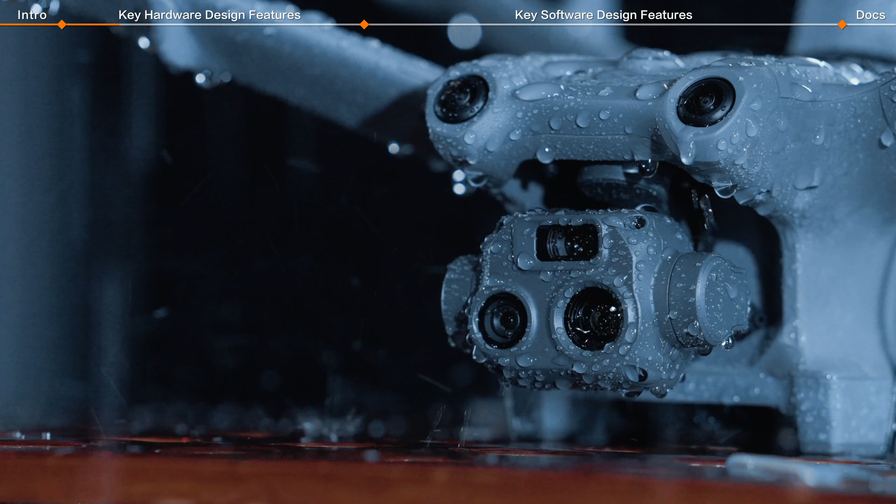Second, IP rating. The DJI Dock 2 achieves an IP55 protection rating, which means it's dust protected and can withstand water jets from any direction. The DJI Matrice 3D series has an IP54 rating, which offers protection against dust and water splashes.

Third, automatic environmental monitoring. The dock integrates various environmental sensors, including a wind speed gauge, rainfall detector, temperature and humidity sensors. These sensors provide real-time environmental condition monitoring to ensure flight safety.

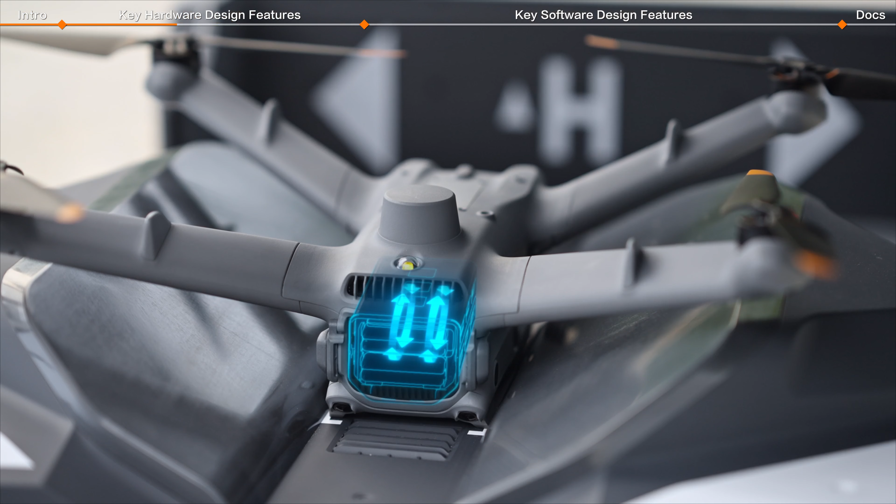Fourth, air conditioning system. The air conditioning system within DJI Dock 2 activates to maintain optimal condition for the aircraft and battery. Cooling system: activates when the cabin temperature exceeds 35 degrees and terminates when it drops below 25 degrees. Activates when the battery temperature is above 35 degrees during charging and terminates when it falls under 30 degrees.

Heating system. If the ambient temperature is below 5 degrees, it activates 1 hour before the task to heat up for 1 hour to prevent propeller icing, and activates again after the task is completed to heat for half an hour to speed up charging. If moderate or heavy rain is detected and the environmental temperature is between -5 and 5 degrees, with a flight task scheduled within 48 hours, it continues heating for 48 hours to prevent propeller icing.

Fifth, backup battery. The dock includes a backup battery with a capacity of 12 ampere-hours, which can power the dock for over 5 hours in case of any emergency power outage, allowing the aircraft to safely return to home.

Sixth, wind resistance. The aircraft can withstand wind speed up to 8 meters per second during takeoff and landing, and up to 12 meters per second during normal flight operations.

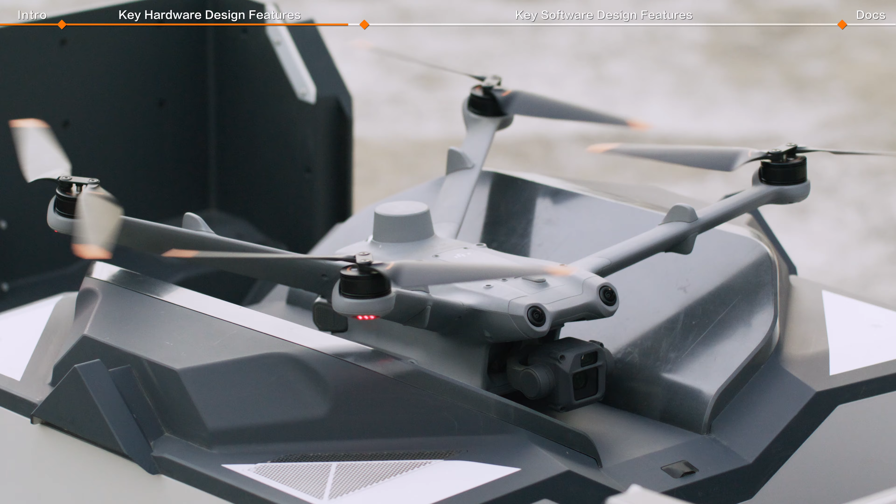Seventh, propeller damage detection. After landing, the aircraft performs damage detection for all propellers, using the visual sensor to check propeller integrity to improve operational safety.

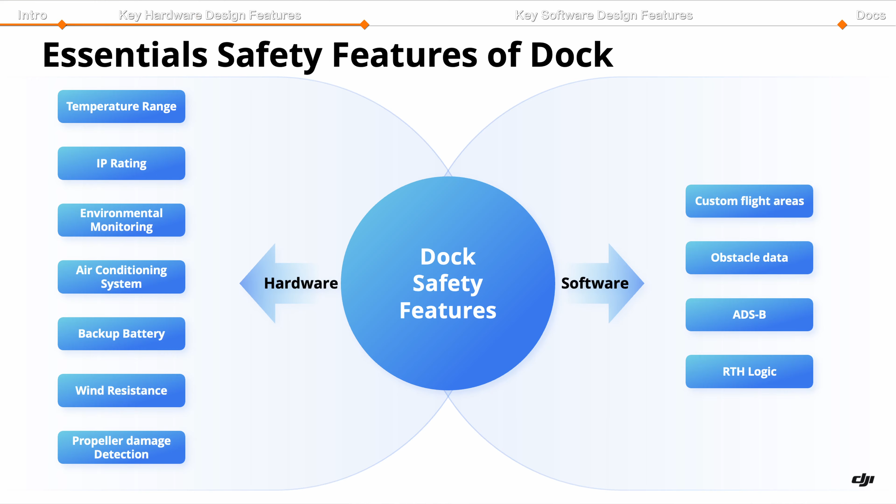And for the software, we will introduce 4 important safety features: custom flight areas, obstacle data, AirSense, and return-to-home logic.

Custom flight area. In our routine dock operations, it's important to ensure that drones do not fly into unrelated areas. Custom flight area supports the creation of task areas and geo zones, allowing the user to draw either polygons or circles. For polygons, the maximum number of vertices should not exceed 255.

The minimum radius of a circle task is 10 meters. Let's see how we can set it up. First, make sure we have the project admin authorization. Then enter the project and click Map Task Area.

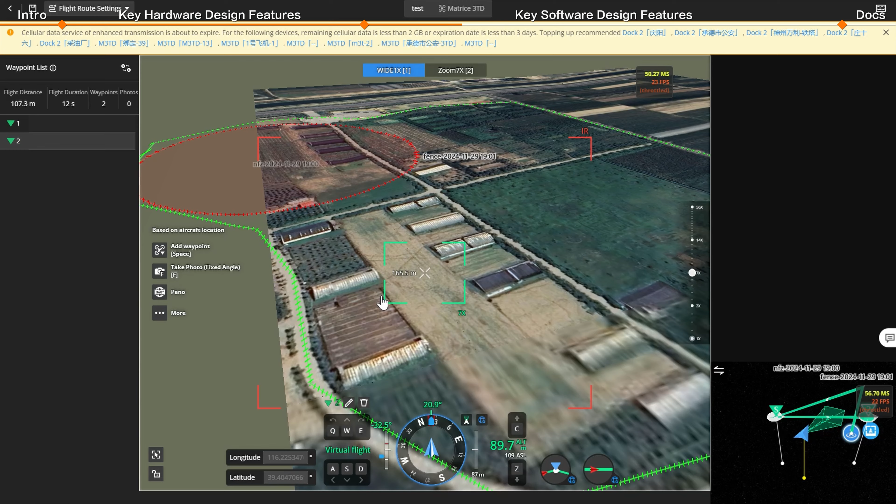Click the icon on the right side to start the planning of the task area and geo zone. After the user confirms the flight areas, they will be displayed during mission planning.

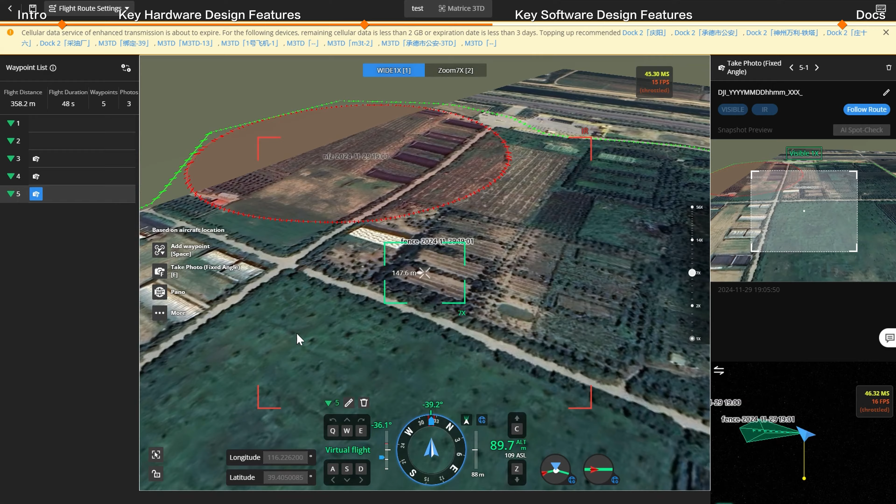During the execution of the flight path, if the drone comes within 5 meters of the boundary of a custom flight area, the mission will be stopped and the drone will return to home immediately. When the drone is planned to pass through a geo zone between two waypoints, or during the return to home journey, the drone will utilize a certain algorithm to automatically calculate the optimal detour route.

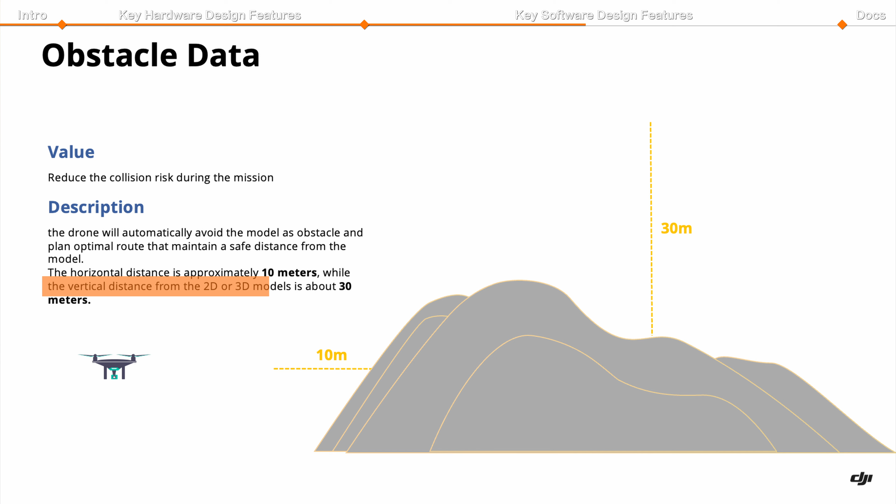Obstacle data. The value of this function is to reduce the collision risk during the mission. After enabling the function, the drone will automatically avoid the model as an obstacle and plan an optimal route that maintains the safety distance from the model. The horizontal distance is approximately 10 meters, and the vertical distance from the 2D or 3D model is about 30 meters.

To enable this function, first we need to import a new model and display it on the map. Then enable the function and update the data. The aircraft will automatically plan an optimal route to bypass the obstacle during flight to task or return to home.

AirSense. The value of this function is to evaluate the collision risk in real time, by obtaining and analyzing the location, altitude, orientation, and velocity of the manned aircraft or helicopter, and comparing the information with M3D's current location, altitude, orientation, and velocity to have air risk awareness.

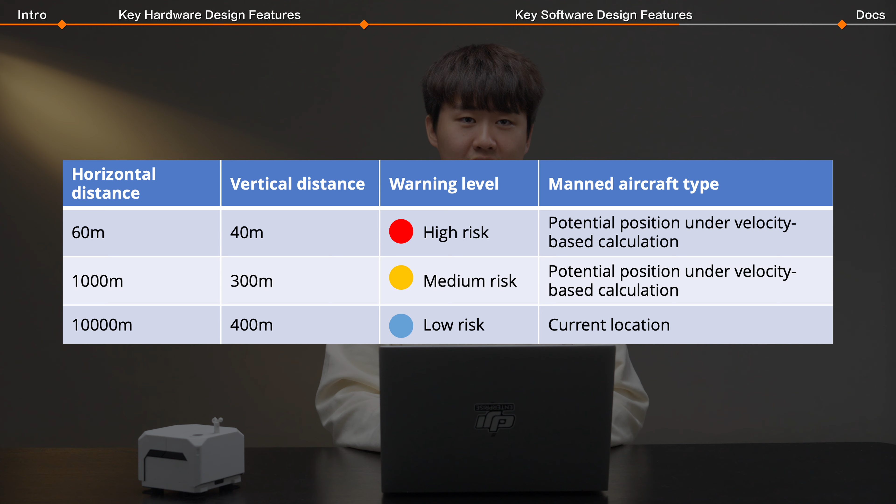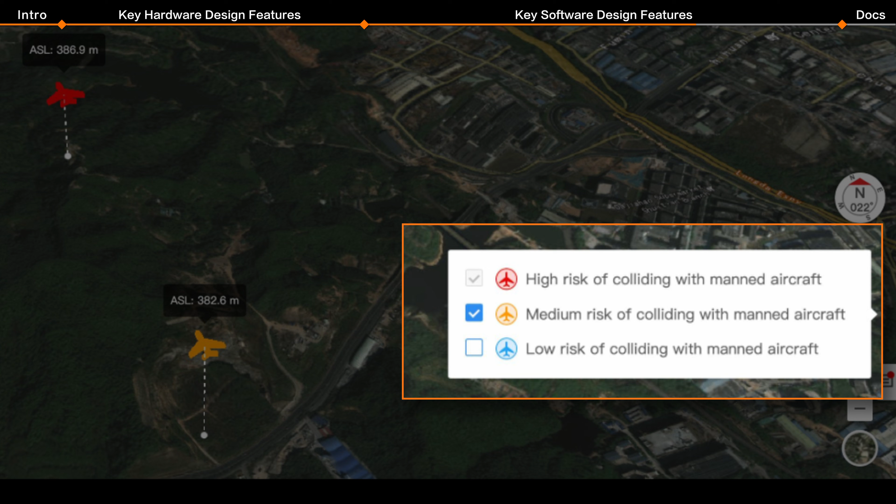ADS-B detection range is 10 kilometers horizontally and 400 meters vertically. Based on the different distance between the drone and the manned aircraft, we define the manned aircraft with threats as high risk, medium risk, or low risk, and display them on the map in red, yellow, and blue colors respectively. The user can also choose to turn off the medium and low risk manned aircraft threats.

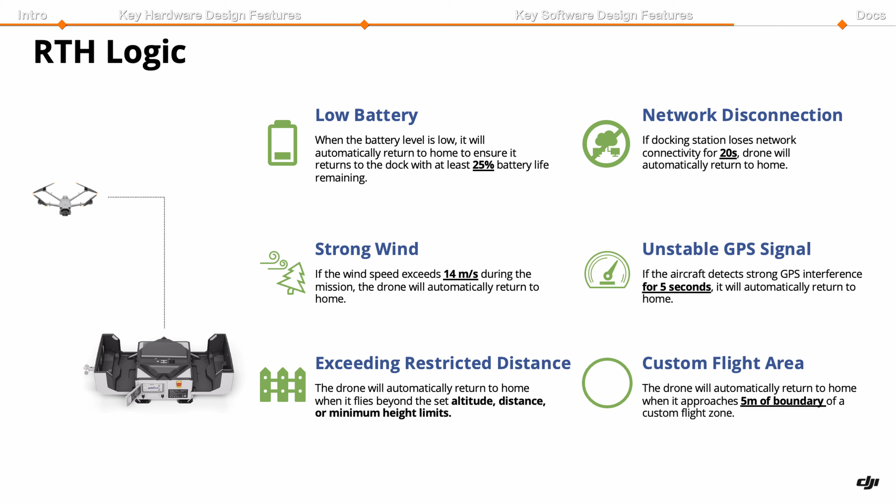Return to home logic. In certain conditions, the drone will return to home automatically. Here is the logic. Low battery: when the drone's battery level is low, it will automatically initiate a return to home procedure to ensure it returns to the dock with at least 25% battery life remaining.

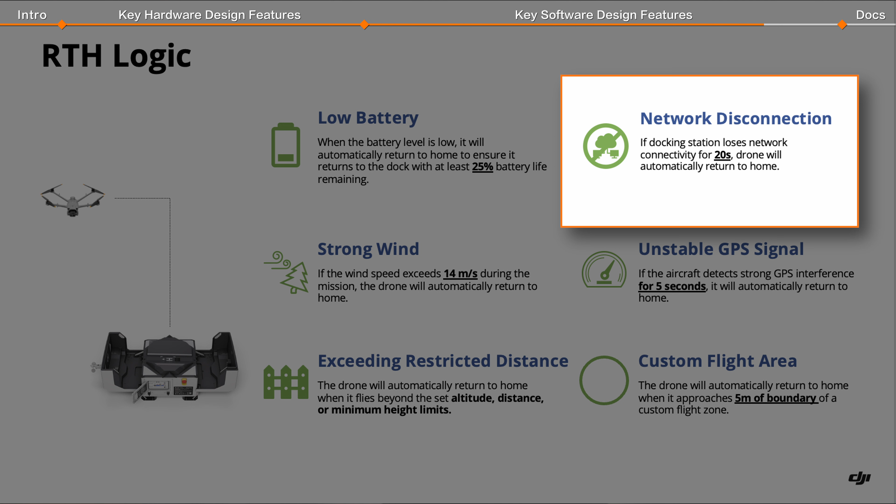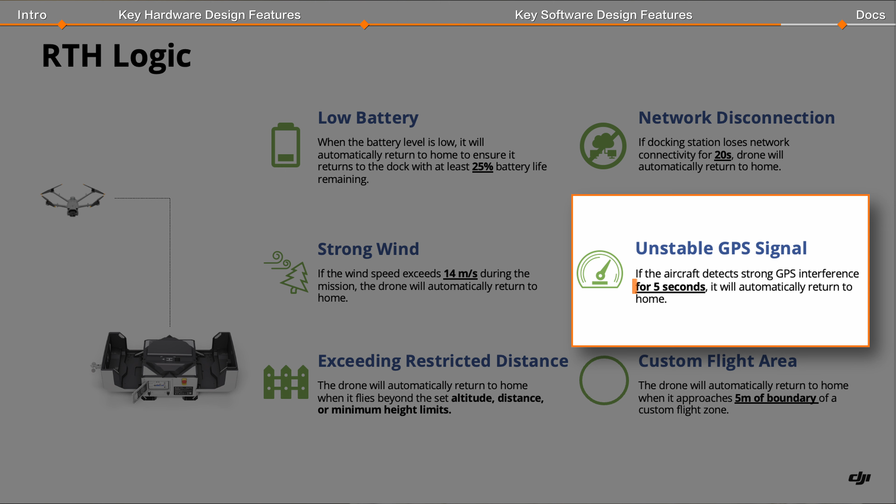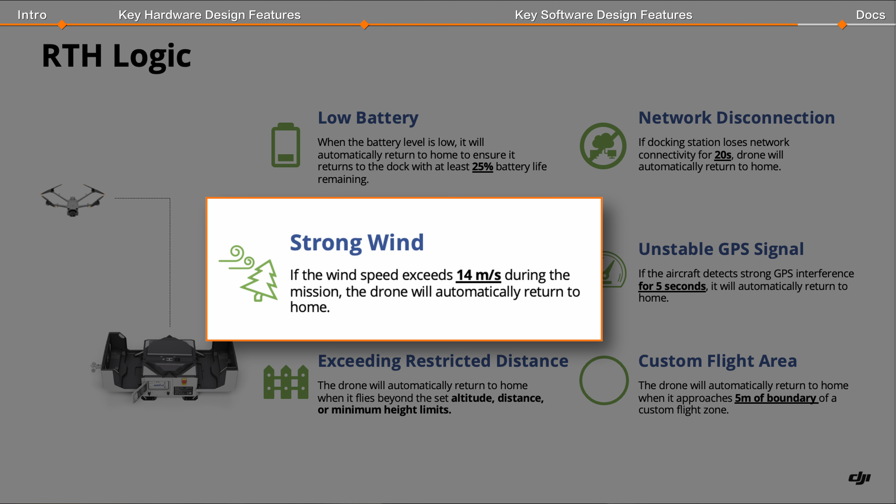Network disconnection: if the dock loses network connection for 20 seconds, the drone will automatically return to home. Unstable GPS signal: if the aircraft detects strong GPS interference for 5 seconds, it will automatically return to home. Strong wind: if the wind speed exceeds 14 meters per second during the mission, the drone will automatically return to home.

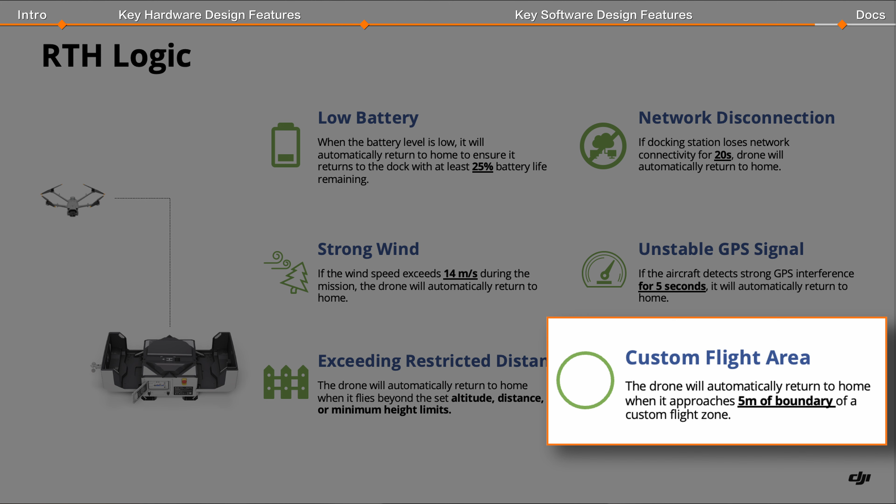Custom flight area: the drone will automatically return to home if it approaches 5 meters from the boundary of custom flight areas. Exceeding restricted distance: the drone will automatically return to home when it flies beyond the preset altitude, distance, or minimum height limits.

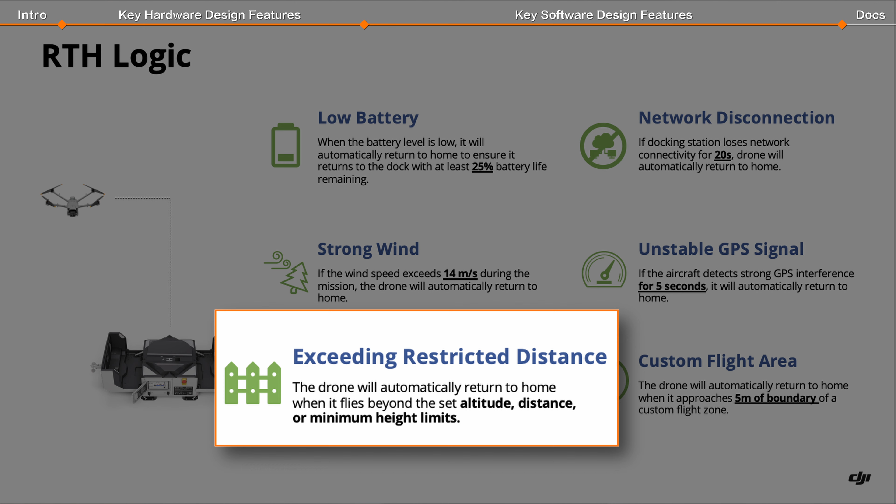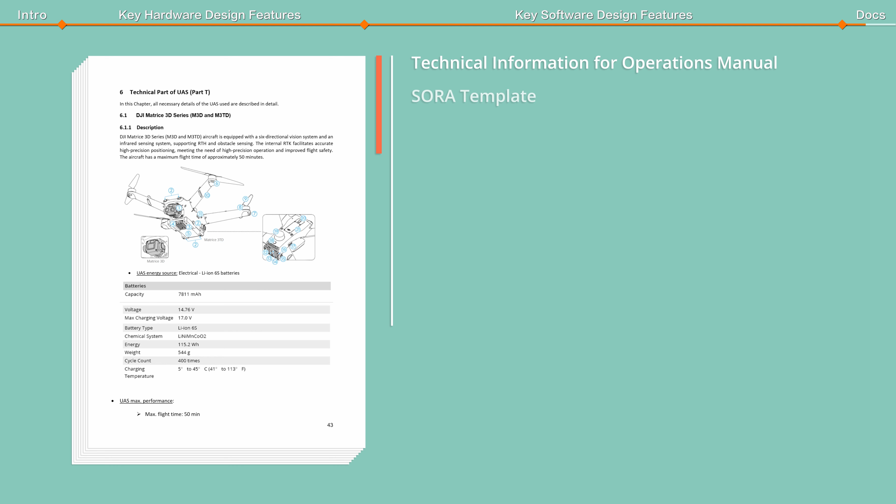To help dock operators fly safer and get approval more smoothly, DJI provides essential documentation to facilitate the SORA process, including technical information for the ops manual, SORA template, and compliance of requirements, manufacturer declaration as basic containment for the SORA, and so on.

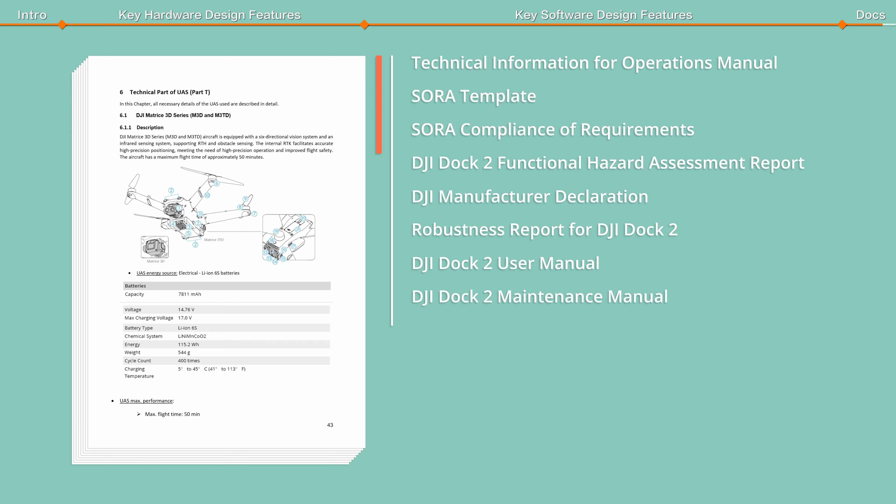Of course, all of the features we mentioned today are listed in the documentation. Feel free to download them. Thank you for your attention, and we conclude today's lesson. In the next lesson, we're going to discuss more about dock workflow in various scenarios.